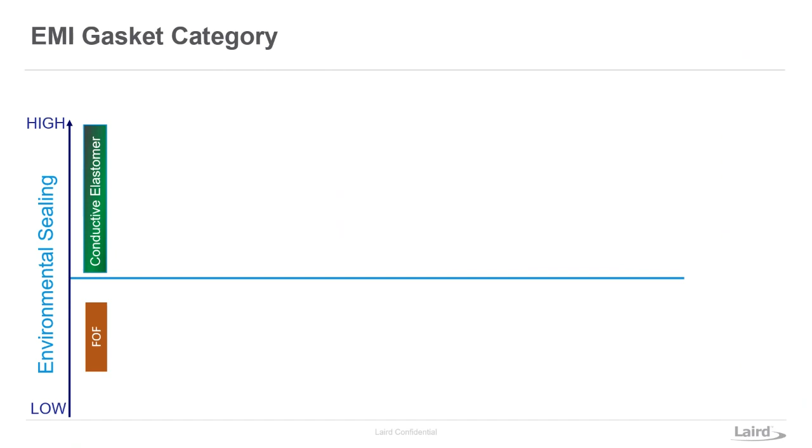On the EMI gasket product lines, we really have two types of gaskets you can choose. One is called Conductive Elastomer. Another one is called FOF. Under Conductive Elastomer, we have two subgroups. One is called ECE, Electrical Conductive Elastomer, and another one is called FIP, Form in Place Gasket. The biggest difference between these two really is FIP needs a technique called dispensing to form a gasket and cure at the customer's place to form a proper gasket product.

For ECE, it is something you will receive as a gasket already. Then you install it in the groove you have at your side. Yes, it needs tooling for us to produce this kind of product. However, for FIP, you don't need any tooling for gasket formation.

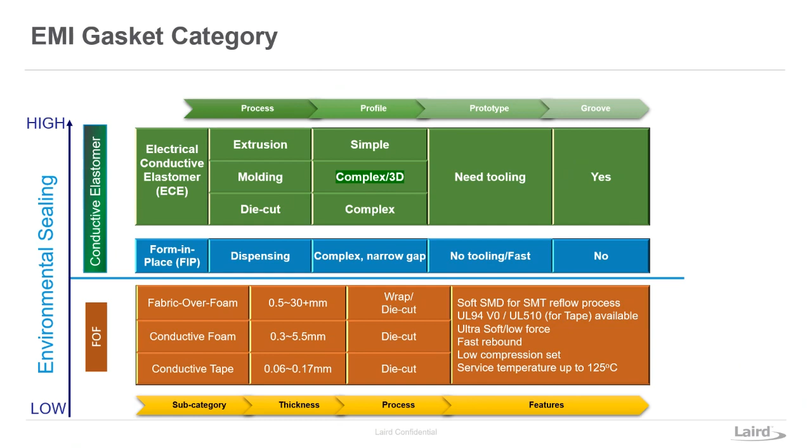On the FOF, we have three different types: fabric over foam, conductive foam, and conductive tape. Each of them can be formed by die cut techniques. You have various options of these product lines or families for different applications. I will quickly cover them in the next few slides. For Laird FOF gaskets, as I mentioned, there are three different types, so we are going to talk about them one by one.

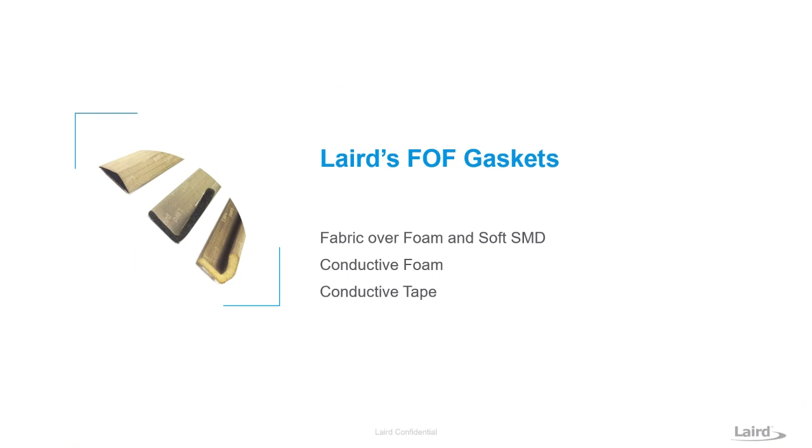First of all, fabric over foam. It is a very traditional product line from Laird, and we are always targeting to produce products which are halogen-free and RoHS REACH compliant. Within the product lines, there are products rated UL94V0 for flammability.

FOF products offer very good shielding effectiveness with very low compression force and excellent compression set. Currently, we are offering products with an operating temperature range from -40 to 125 degrees C. And last but not least, we are offering SMD grades, which are compatible with the SMT reflow process.

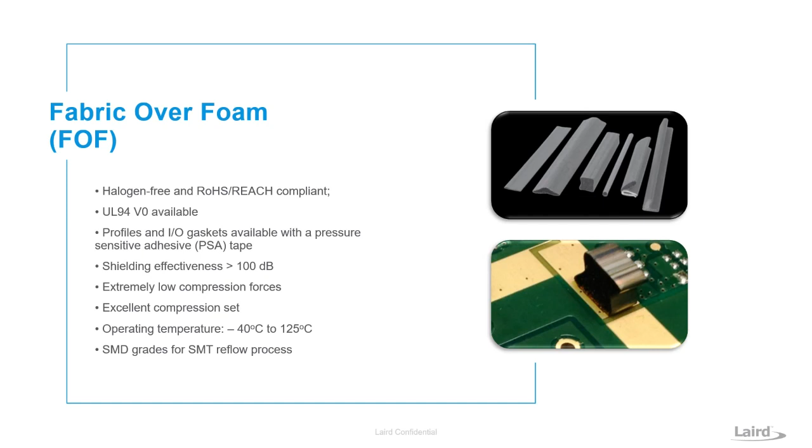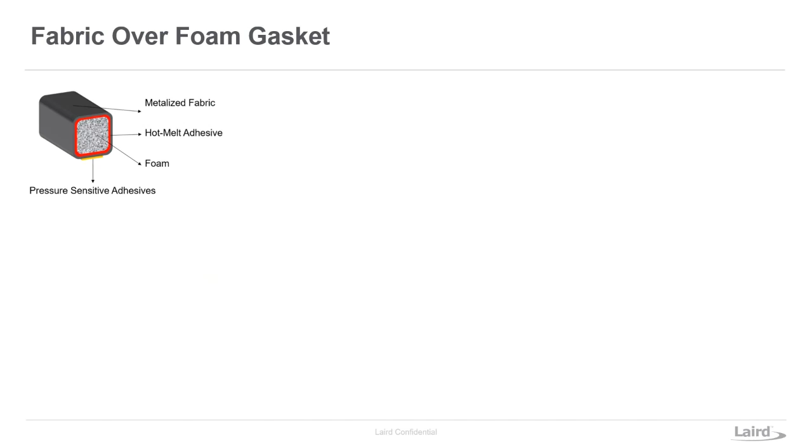On this page, if you look at the diagram on the top left, it gives you a basic idea of how the fabric over foam gasket looks. By the name, really, it is foam inside, wrapped around with a metallized fabric. In between, the hot melt adhesive helps bond them together. You can choose either with or without a pressure-sensitive adhesive to help with the mounting.

The diagram in the middle is a material selection guide for you to choose what kind of fabric and foam options for any FOF gasket. The clue behind this diagram really is, if you don't have any choice in mind, then start with 775. That's a standard product you can choose from the Laird family. Or you can start with 51H if flame retardancy is needed.

Beyond that, there are four different aspects you can go with. You can go with either high temperature, or a different color like black, or different softness or hardness for the gasket. And the last one really is we do offer some specialty products.

Let me take you through an example. Say you start with 51H. That's a standard flame retardant FOF gasket you can have. If you're not happy with the temperature rating, or you are really looking at a higher temperature environment or application, say 125 degrees C, then 617 probably is a better choice.

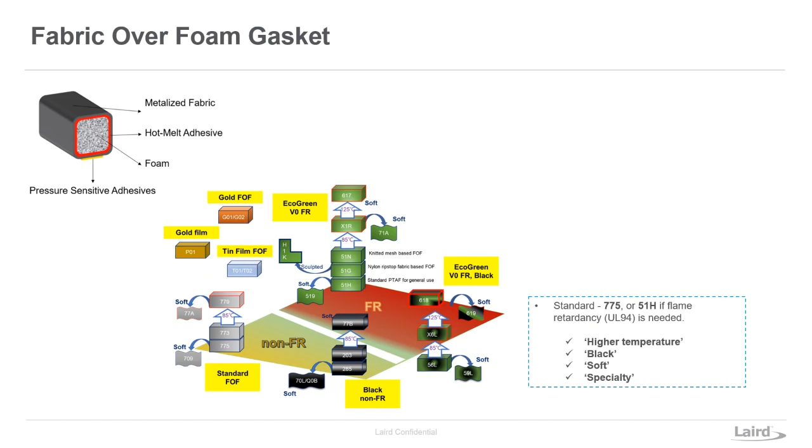And if you're not happy with the color, and you'd like to have something in black, then 618 will be the choice. And if you're not happy with the softness of 618, then go for 619. So that's basically how you use this diagram for choosing the different material of a FOF gasket. And for specialty products, if you look at the top left of this diagram, you can have a gold-plated wrapped FOF gasket as well, just as an example.

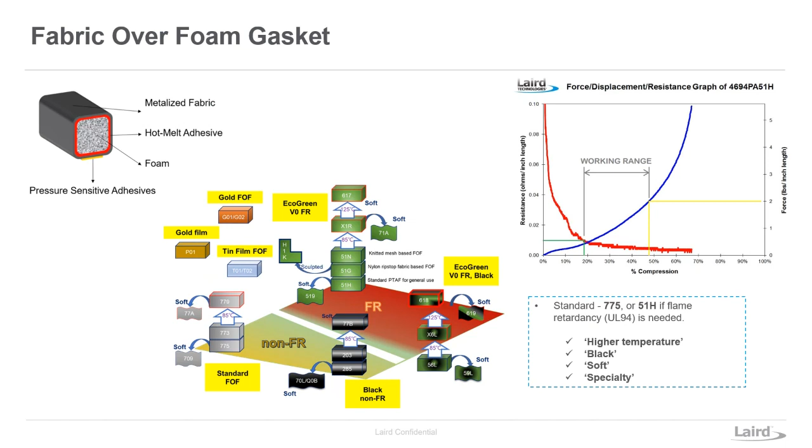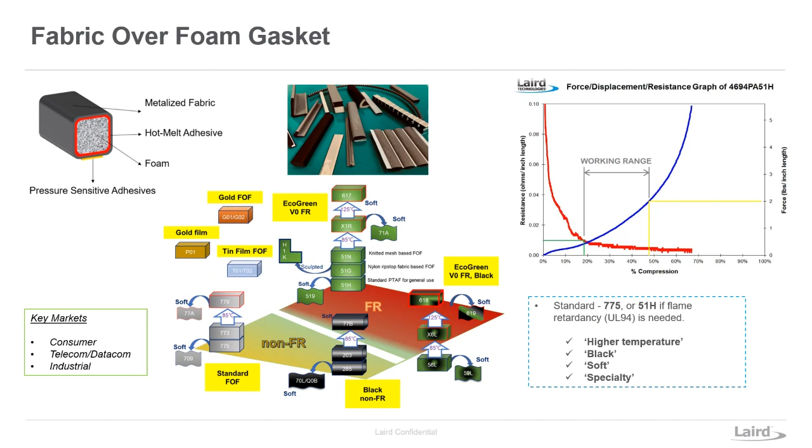And we haven't touched on the profile of FOF gasket yet, but if you look at the picture on the top middle, that's the different profiles you can have for our FOF product lines. And in terms of what kind of application or market this type of product has been supplied to, really, we're looking at consumer devices, telecom, datacom equipment, and also industrial equipment as well.

And on the FOF product lines, we also have something called Soft SMD Contacts. This is a kind of product leveraging the existing FOF techniques to form a product which is SMT process compatible. And currently we are offering 2 temperature rated products, which are 85 degrees C and 125 degrees C products.

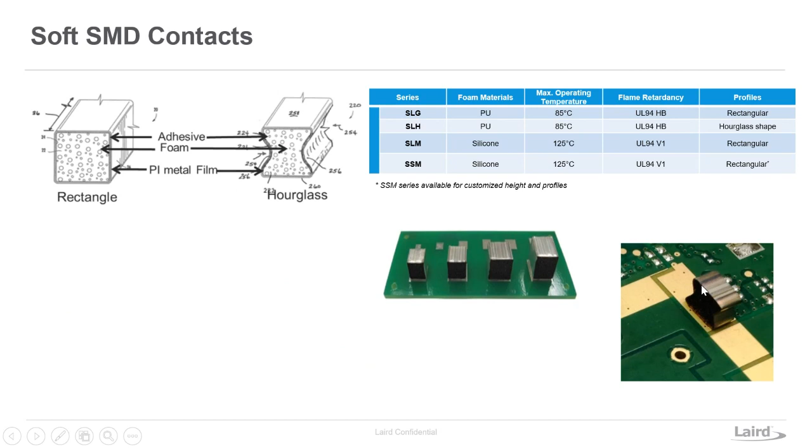For the 85 degrees C category, we have SLG, which is a rectangular profile, and also SLH, which is an hourglass shape. And for the 125 degrees C category, you have SLM, which is rectangular, and SSM, that's the product you can have for any customized requirements, for any height and profiles. And if you look at the picture on the bottom right, that's a typical profile you can have, which I covered early on. Rectangular and hourglass shape.

And really, for this type of product, you can have anything up to 125 degrees C, which is a typical application temperature for the automotive industry. And because it is a good leverage of existing FOF techniques, this kind of soft SMD contact has very low compression force with very good compression set. And currently, from a flammability perspective, we have product which can be rated up to UL94 V1. And at the moment, for standard products, we only offer from 3 millimeters to 10 millimeters for height.

And in order to accommodate the automation process at the customer end, we are offering tape and reel packaging for any automated process. Again, it is SMD grade, so it is compatible with any existing SMT reflow process. So you don't need to modify any process for applying this kind of soft contact. Like what we have for FOF, this kind of product is widely used in the consumer device market, and we've also seen a good amount of application from the automotive market as well.

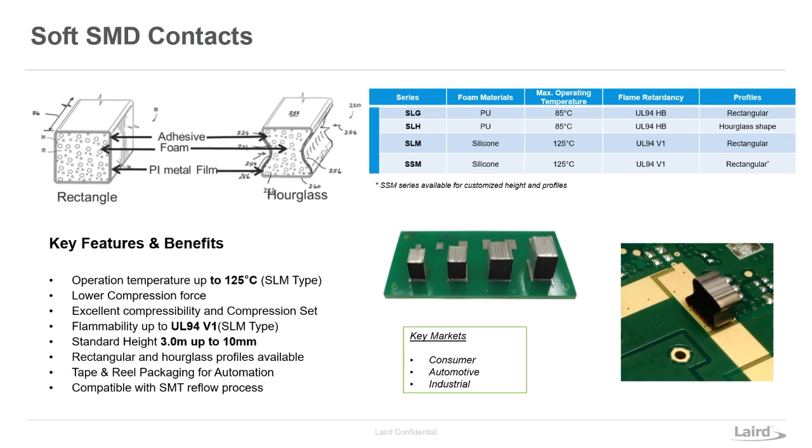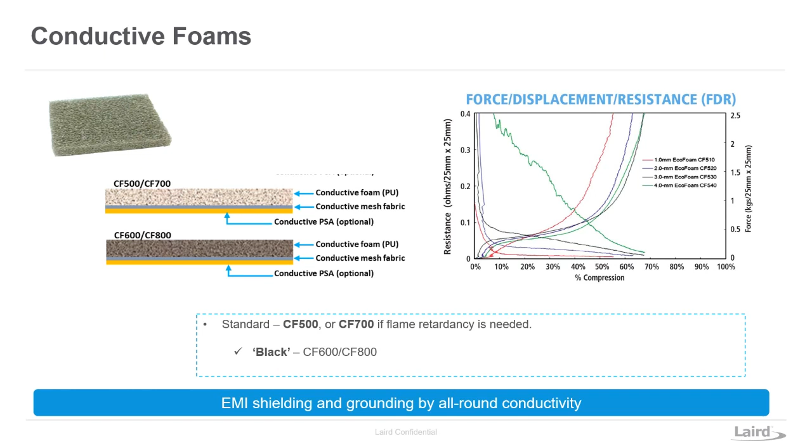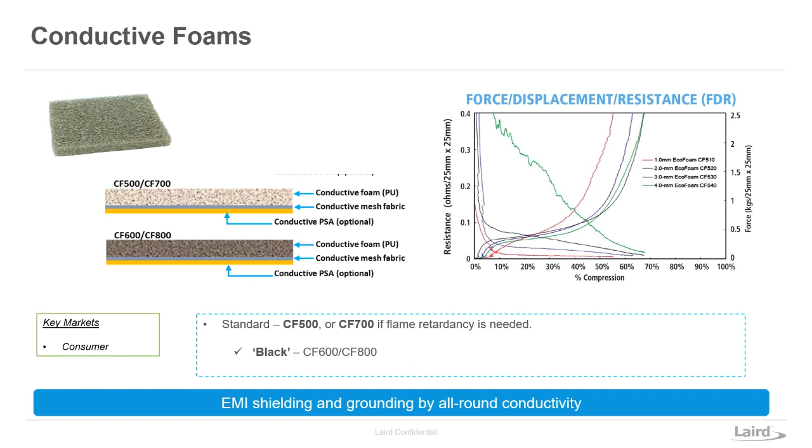As I mentioned, conductive foam is a very compact solution for achieving EMI shielding and grounding with its all-round conductivity. And just like what we discussed for FOF products, we offer FDR curves for our design engineers for each type of conductive foam. Again, the key market for this type of product is really consumer devices. I have some good examples for you in the next few slides.

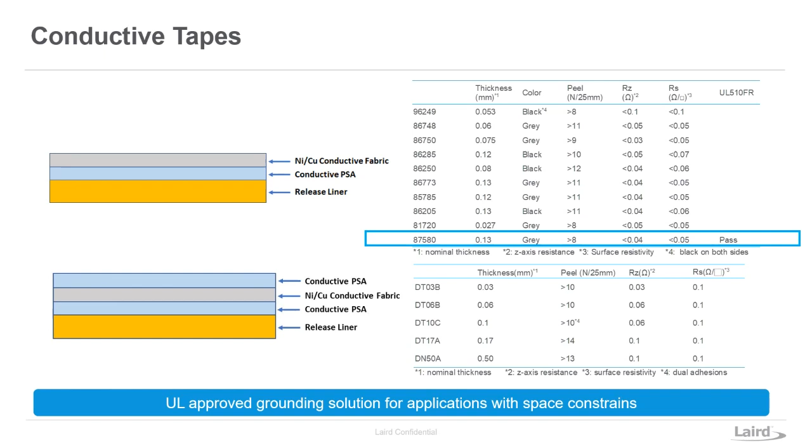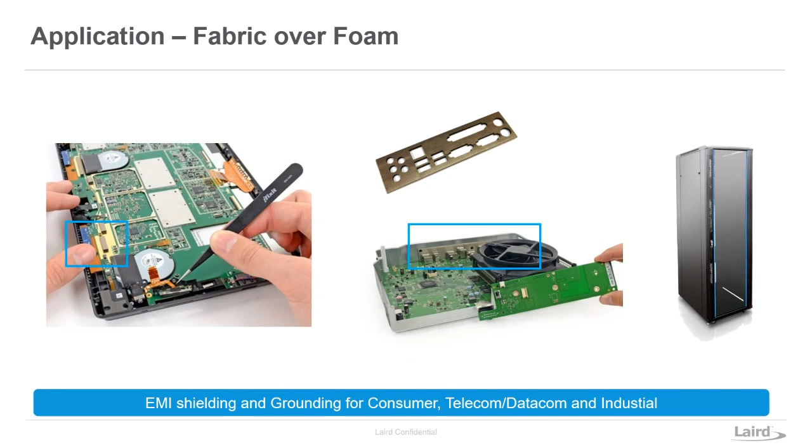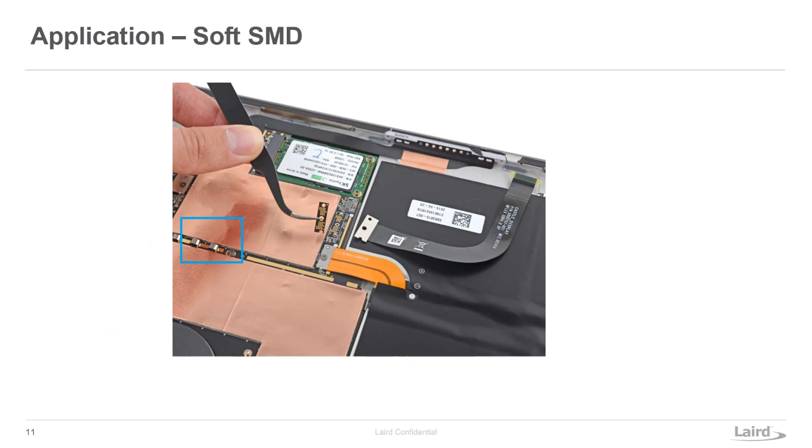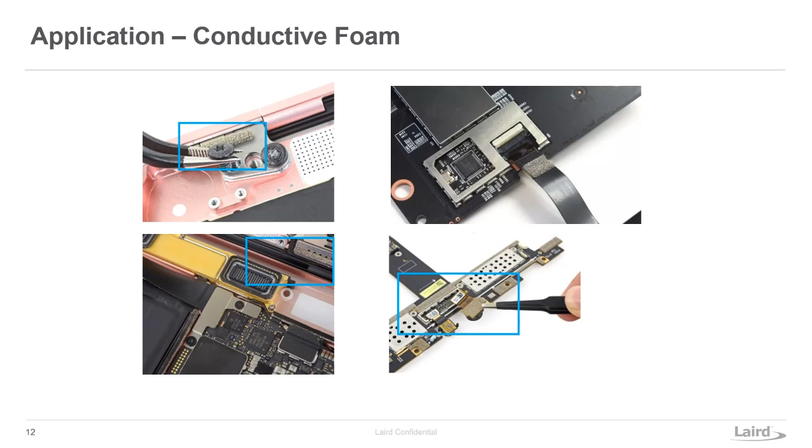On this page, I'd like to quickly show you a new product we call Flex G Gasket. If you look at the picture on the top right, that's how the product looks. The product itself is a good leverage of existing FOF techniques or FOF materials, but with a very novel design. And if you look at the picture on the bottom right, that's how it applies to the metallic housing for any grounding applications.

And we did a quick comparison between the traditional metal finger stock, traditional FOF gasket, and the Flex G gasket. What we found is that it is a very good shielding material, as effective as the two traditional products. However, it offers much lower compression force, even lower than FOF gasket, because of this innovative design or profile. And Laird has a patent for this type of product.

And we've seen more and more consumer device manufacturers, like gaming consoles, start to use this type of product for their devices for any grounding applications.

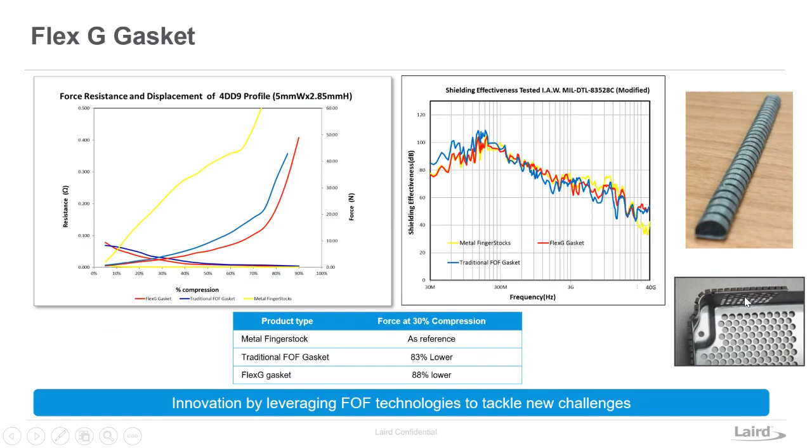Next on, we will talk about conductive elastomer gaskets. There we will be covering 2 types of gasket, ECE and FIP. Before we jump into each individual one, let's have a quick look at what a conductive elastomer is. By the name, it is a solid elastomer which contains dispersed particles of conductive materials. If you look at the diagram on the screen, the gray circles are the conductive fillers, and the white bit is the polymer matrix.

So it is made electrically conductive through this metal filler, which is embedded in the base polymer matrix. And that's how it works: when it is compressed, it forms a conductive path, and the electrons go through the path formed by the conductive fillers. For the polymer matrix, currently you can choose silicone, fluorosilicone, and EPDM.

If you look at the ECE or conductive elastomer products on the market, typical fillers you can have are silver-coated nickel, silver-coated copper, silver-coated aluminum, pure silver, and nickel-coated graphite. And the diagram on the bottom right gives you a basic idea of the size of this kind of particle. It is an example of silver aluminum.

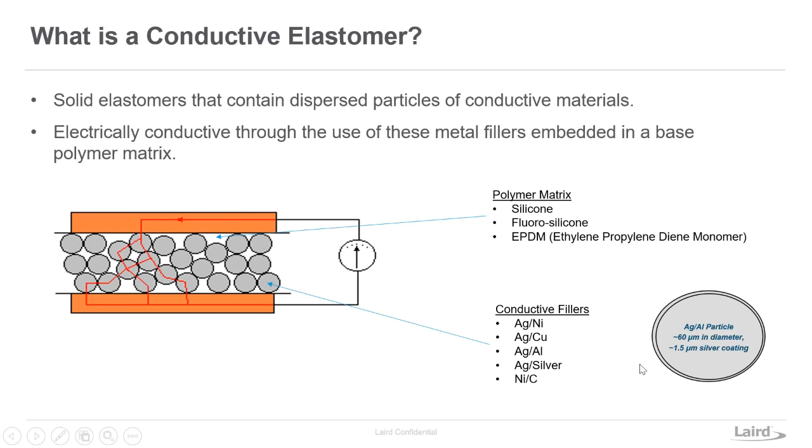Now we move on to FIP gasket. As part of the conductive elastomer offering, FIP really has got various filler options for you. We are currently offering two grades there, called room temperature curable and high temperature curable. For this type of gasket, we are talking about a typical compression range from 10 to 50%.

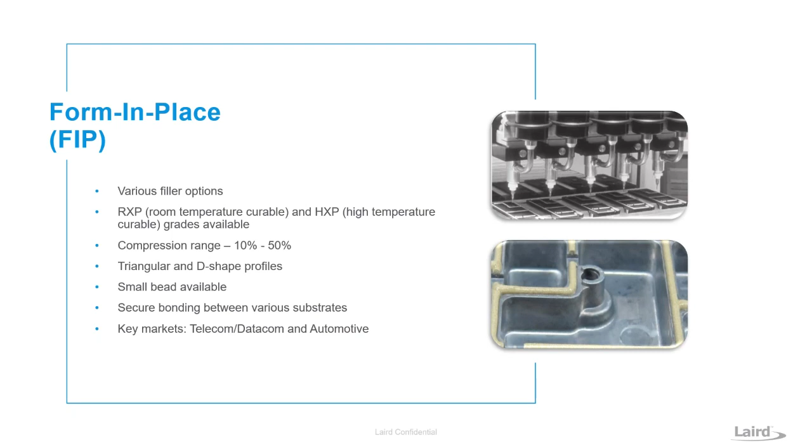Currently, we can offer two profiles as well, triangular and D shape. For some grades, we are offering small bead for any miniature application. Typically, FIP has very secure bonding between the gasket itself and various substrates like metal, plastic, etc. Currently for Laird, the key markets are telecom, datacom applications and automotive.

This page gives you a quick idea of what kind of FIP gasket you can choose. For FIP, we are offering both non-conductive and conductive. For the conductive family, you can choose 4 different fillers: silver copper, silver aluminum, silver nickel, and nickel graphite. You have different choices of hardness as well, and that forms the product offering you can have as FIP from Laird.

For example, if you choose silver nickel, the part name will start with SNN. If you're looking for Shore hardness 55, and it can be cured by heat, then SNN55 HXP is the grade you could have. For a typical grade of FIP, we are offering 3 different packagings: 55 cc, 300 cc, and 3 kilo buckets.

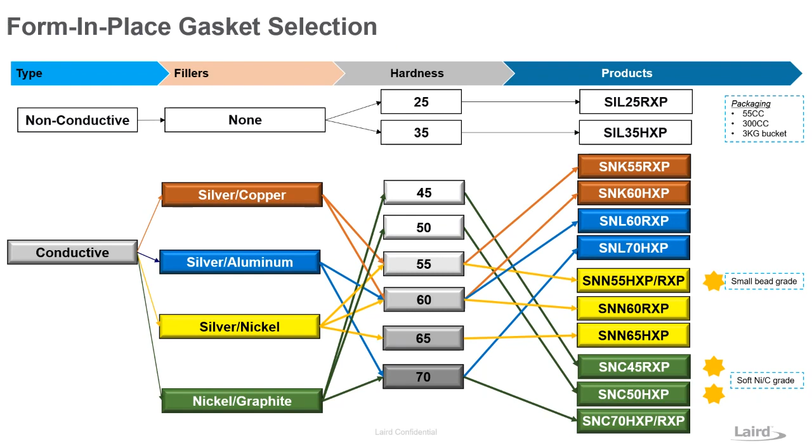So for soft nickel graphite FIP, as I mentioned, we're offering 2 different profiles, traditional D shape, and currently we are looking at triangular shape. I have a quick video to show how the FIP paste can be dispensed and form a gasket.

It is a pre-programmed process, and the dispense machine goes with a preset program along the aluminum die casting part. By doing that, the FIP gasket is dispensed and formed where it needs to be. After that, it goes through a curing process. In this case, it will be cured by heat, at high temperature.

If you look at the difference between the traditional D profile and the triangular profile, really it is about material saving. With the triangular profile, we are talking about 10 to 15% lower material usage. That means a cost saving for the customer. If you look at the video carefully, it is quite an efficient process as well, driven by another feature for this type of gasket: the high flow rate.

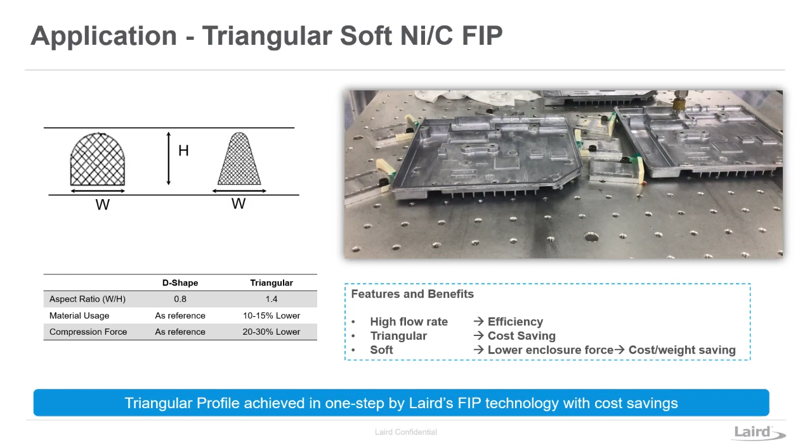On this slide, really, I'd like to show you a quick example of our small bead SNN55 FIP application. The picture you look at on there gives you a good example of the optical transceiver module. And the FIP gasket will be applied on the die-cast housing as an EMI shielding gasket.

And this product typically is talking about miniature structure. That means you don't have very much room, or only a small bead gasket is needed or required for those kinds of structure design. So with this kind of small bead FIP, you are able to achieve a gasket which is below 0.5 millimeter, something around 0.4 millimeter, and it also has low hardness, which is around 55 Shore A. Again, that's a good advantage for achieving lower enclosure force overall for this kind of module.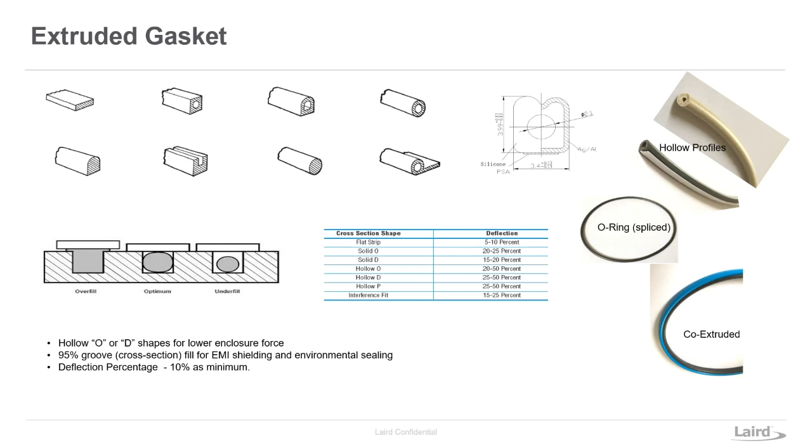As I mentioned, the gasket you choose has to be a good fit for the groove in your design. A 95% filling of the groove is recommended for both EMI shielding and environmental sealing. And it has to be compressed to achieve EMI shielding. So we are talking about 10% as a minimum to start with. Anything above 10% and below 50% is the operating range we would recommend for this type of extruded gasket.

On this page are some examples of our molded gaskets. On the left-hand side are 100% molded ECE products. You will see some very complicated designs, like sharp edges, gaps, and steps for the different profiles. That's really a good demonstration of Laird's molding techniques. These techniques give you the flexibility to have an EMI gasket that accommodates any complex configuration or structure design at the customer end.

On the right-hand side, there are some examples of specialty products. We talked about extruded profiles, and we just covered molded gaskets. The example on the top right is a combination of an extruded product and a molded product as a whole. By combining these two types of gasket, we have a product called cable gland formed for typical telecom and datacom applications, for both environmental sealing and EMI shielding.

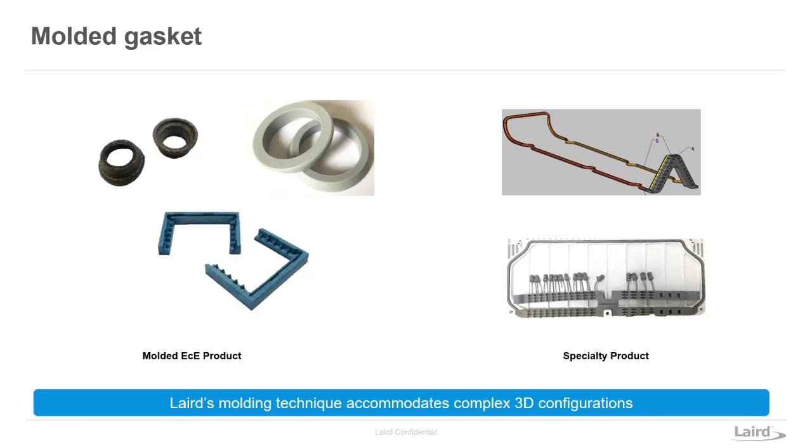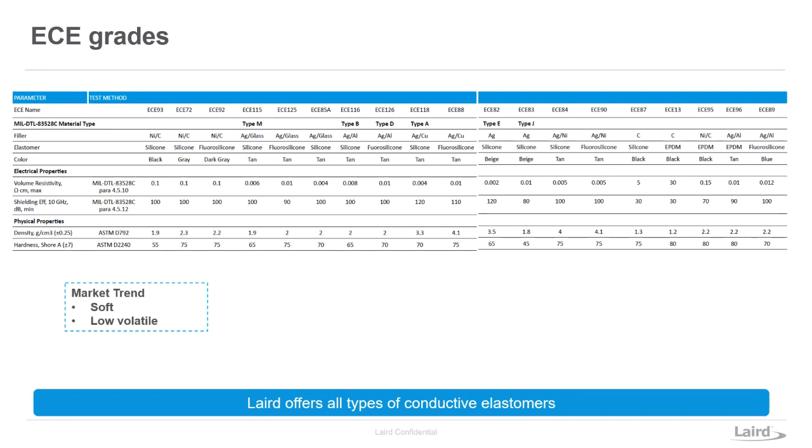This page is really a good demonstration of how broad a choice of ECE grades you can have from Laird. I'm not going to cover each of them. Basically, we offer all sorts of different matrices with all sorts of different fillers for different applications, either military or non-military. And more importantly, what we're seeing is that ECE material has gone soft, and in some cases, low volatility is also needed for some applications. So I have some examples for you in the next slides.

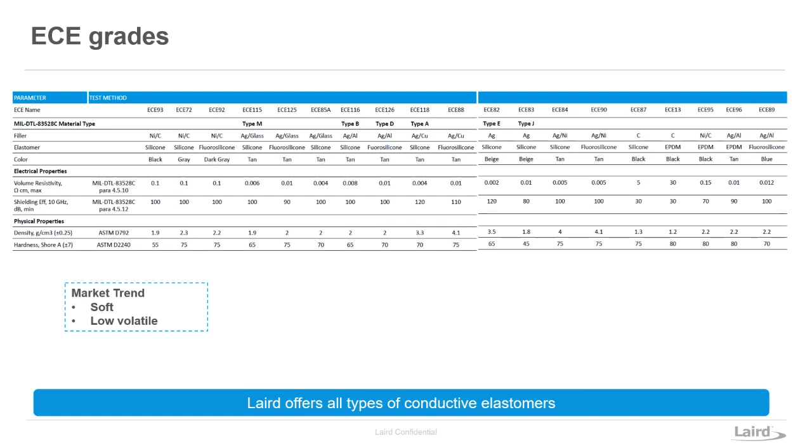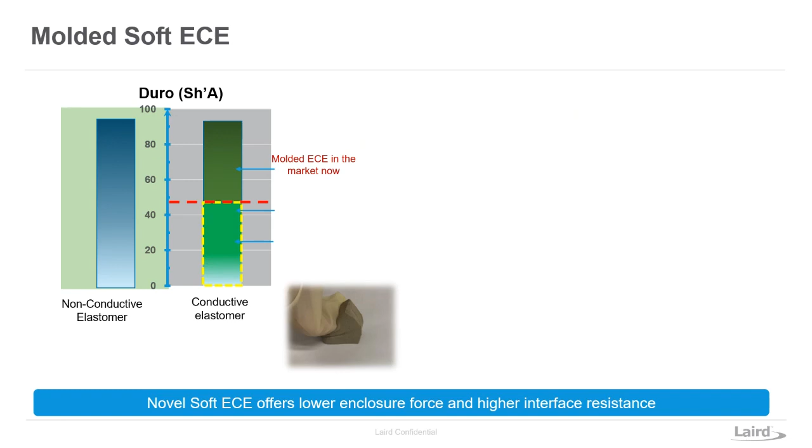Okay, so on this slide, for the molded product, a molded ECE product, we are really talking about something that has got Shore hardness around 65 to 75. And that's a traditional or typical ECE you can have off the market.

And now in Laird, we're also looking at some soft ECE, which has got Shore hardness around 50 or just below 50. In parallel, we're also looking at some ultra soft ECE product or material as well, which has got Shore hardness around 30.

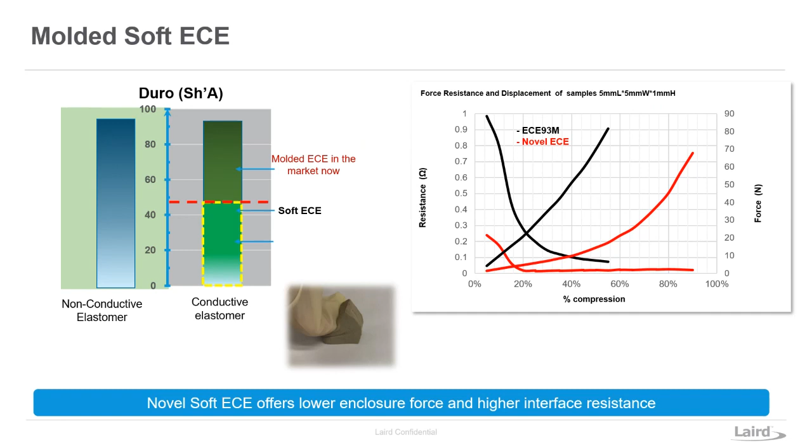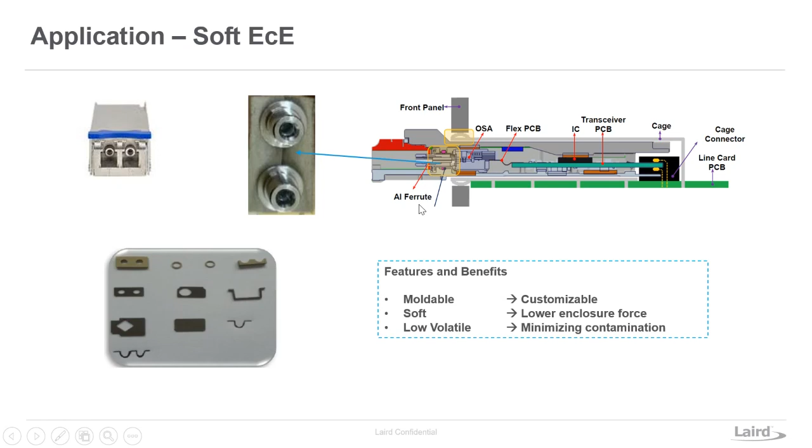However, if environment sealing is the key problem you have in your system or your design, the conductive elastomer will be a much better choice for you. So hopefully that will be something you find useful for choosing any EMI gasket product in Laird.